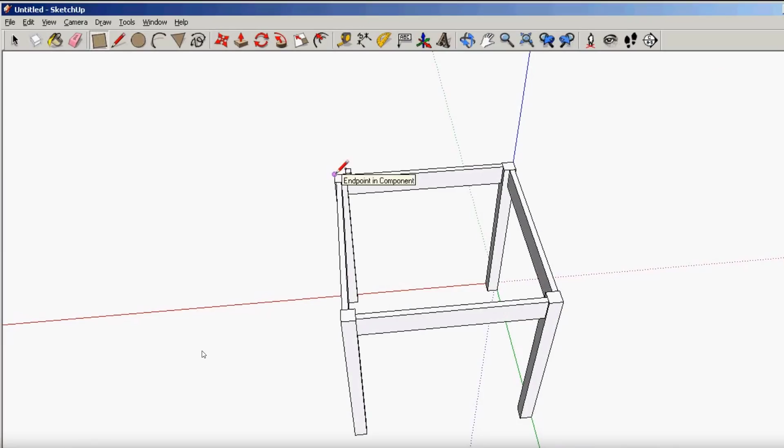So the first reason is fairly straightforward. You may not use 3D much, and SketchUp is actually very simple. It's easy to learn, and you can become fairly proficient at it by simply watching a few YouTube videos. Also, if you're only interested in doing very simple projects, SketchUp is a great application to consider. It has a better interface because it has lots of buttons, and unlike Blender, doesn't require you to learn lots of keystrokes and/or menu items.

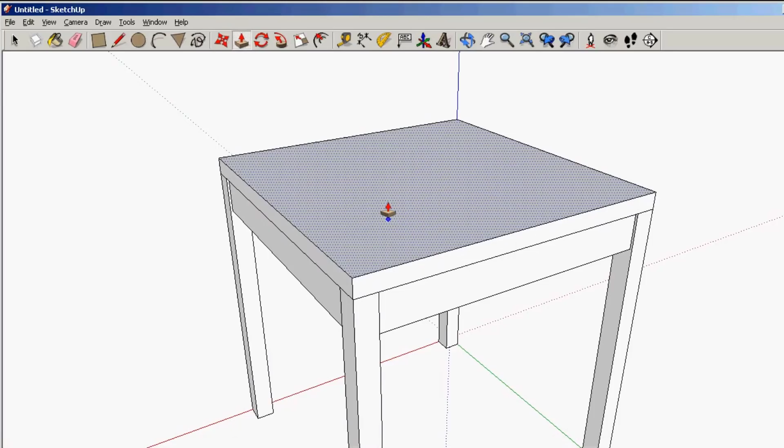The second reason why you might want to consider staying with SketchUp is it has that wonderful 3D Warehouse. Even though there's not a whole lot of great models there, it's easy to find what you're looking for, and it's great for adding correctly scaled models to interiors and exteriors, and sometimes you can use it for even kitbashing different products to make other products out of.

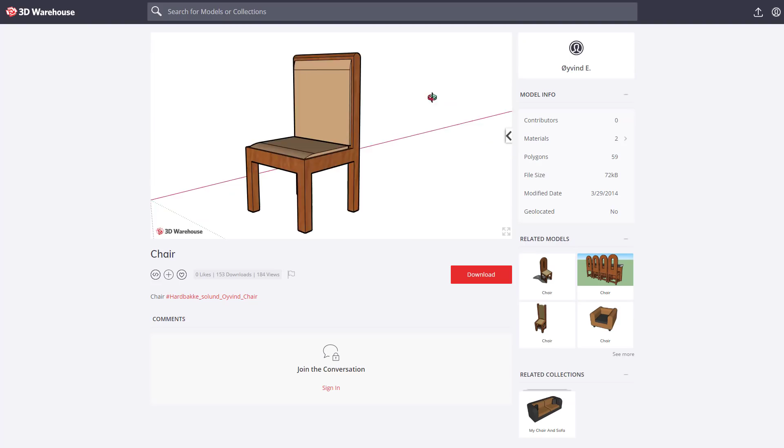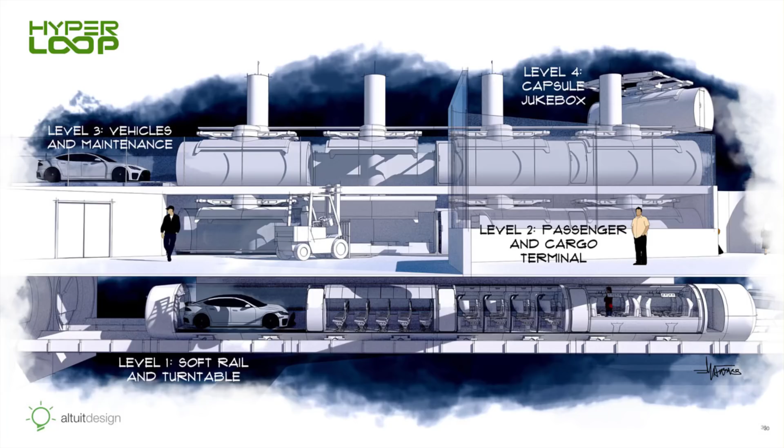Number 3, SketchUp has its own look. Many of you are familiar with the outline, illustrative, and cartoon look of a SketchUp drawing. It's very easy to understand looking at these drawings and these perspectives and these line drawings, and because of that, SketchUp is unique in that there are no other programs that can generate exactly the same kind of look as SketchUp.

Number 4, Blender takes time to learn. As with any powerful program, Blender takes a serious commitment of time to master it. Sure, you can do some basic modeling and rendering quickly, but creating full-feature designs and high-quality renders does take more time.

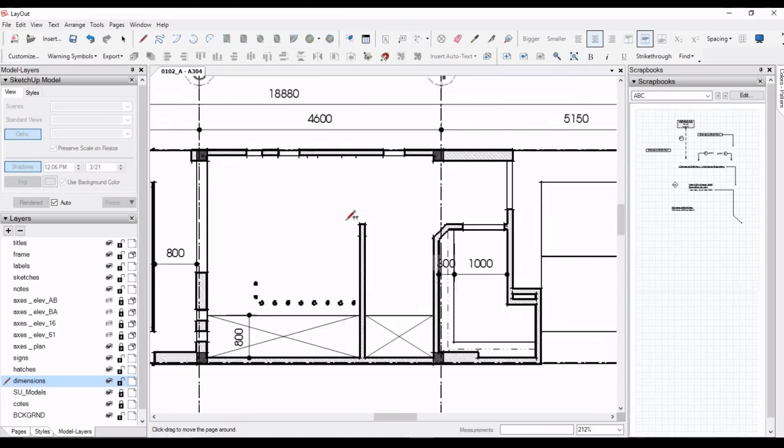The 5th reason why you may want to consider sticking with SketchUp is it's better if you're an architect. If you're trying to create dimensioned and accurate architectural drawings, you may find that SketchUp's a better fit for you than Blender, or for that matter, most any other 3D CAD type program. The 6th reason is that Blender really doesn't have any LayOut or equivalent 2D program. LayOut is SketchUp Pro's 2D drafting application and is especially good at documenting your designs.

And the final reason is that there is a pretty strong plugin community in the SketchUp universe. In fact, the plugin developers are the ones that are responsible for plugging many of the major holes in SketchUp's functionality.

Okay, so now let's count down the top 20 reasons why you may want to consider switching from SketchUp to Blender. Number 20, and maybe the most important, is that Blender is free. Unlike SketchUp, you can download Blender right now and use it on your computer, and you will not be charged one single penny. So that's pretty impressive.

Let's take a quick look at what it does cost you to use SketchUp. The free version is online, does not support any plugins whatsoever, and is basically at this time pretty much a toy. Even SketchUp Shop doesn't support plugins and is very difficult to use to create anything of significance. So the Pro user account is the one that you probably want, and that's $695. Furthermore, once you purchase it, you still have to pay $120 each year to upgrade, maintain it, and get the type of product support that you require.

Number 19. If you're like me, you pretty much hate launching SketchUp because it takes forever to load all the plugins and do all the necessary checks and the license check and all of that. And on my computer, which is an extremely fast i7 computer with lots of memory, it takes 21 seconds to launch, which is ridiculous. On the other hand, when I click on Blender, it takes less than 2 seconds and I'm up and ready to start modeling. So that's a big advantage as far as I'm concerned.

And the number 7 reason why you may want to consider switching to Blender are modifiers, modifiers, modifiers. These are incredible non-destructive polygon modeling, procedural modifiers, which allow you to mirror, boolean, bevel, solidify, subdivide, and 43 other functions to create amazing models and then come back and tweak them to your heart's content without worrying about creating a destructive model. It's absolutely amazing and it's wonderful to watch. I look forward to showing you more about how modifiers are used in Blender.

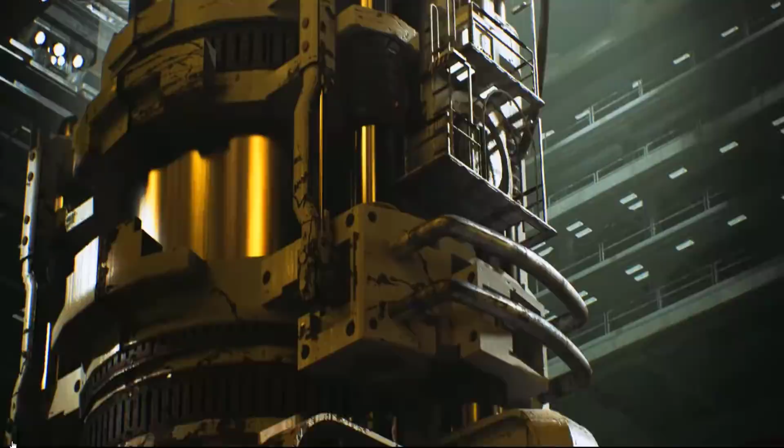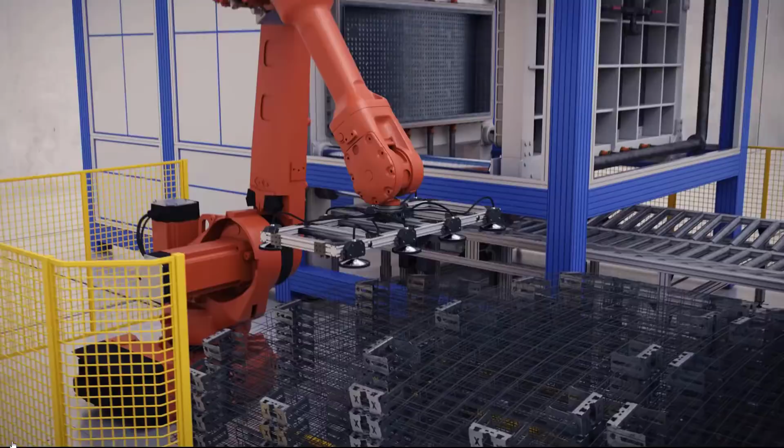Number 6, Blender has production quality animation tools. There have been professionally featured animations and many a commercial advertisement created with Blender. If you're an architect or interior designer, you can create stunning and photoreal interior renderings and animations. And if you're using the new Eevee, which is the real-time rendering, you can create these animations in just a matter of seconds.

Number 5, Blender runs on Windows, Mac, and even Linux. And of course, SketchUp also runs on Windows and Macs, but not on Linux. And the 4th reason why you might want to consider moving from SketchUp is that Blender handles tons, and I mean millions of polygons. And we all know how SketchUp has problems dealing with too many polygons in a scene. Here's an interesting video showing Blender real-time sculpting over 45 million polygons. Amazing.

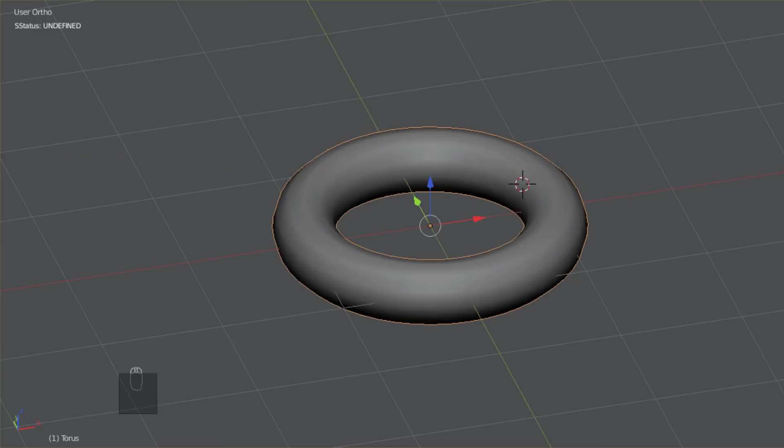Number 3, Blender has a totally customizable interface. In fact, Blender uses the exact same scene rotation, pan, and zoom controls as SketchUp. So you're going to quickly be able to jump right in and manipulate a scene. Plus, there are a number of customized interfaces which optimize modeling workflow and help users get started. We will show you one of them.

Number 2, Blender is open source and Trimble is not. It used to be people thought of open source software as a bit of a risk, but Blender's been around for quite some time now. And in fact, it appears that products like SketchUp that keep getting passed from company to company are more of a risk in terms of understanding what their roadmap is going to be. One last thing I might mention is that Blender is strong in terms of its financial success, and it's funded through different sources, including developers, users, corporations, their own subscription-based course, and a host of other places where they generate revenue, including support plans.

And the number 1 reason for you to consider switching to Blender is the simple fact that Blender's future is brighter. All signs point to the fact that SketchUp will soon have their flagship product placed in the cloud, which means all of the plugin developers will need to rewrite their plugins to be able to work in the cloud on SketchUp's new platform. SketchUp's resources have only focused on creating cloud-based software, and the product and the company are falling farther and farther behind.

So if you want to be proactive, you might consider starting to look in other directions for a new 3D modeling program now. So that's my 20 reasons why I'm switching to Blender. And I think there might be some pretty good reasons there for you to consider it too.